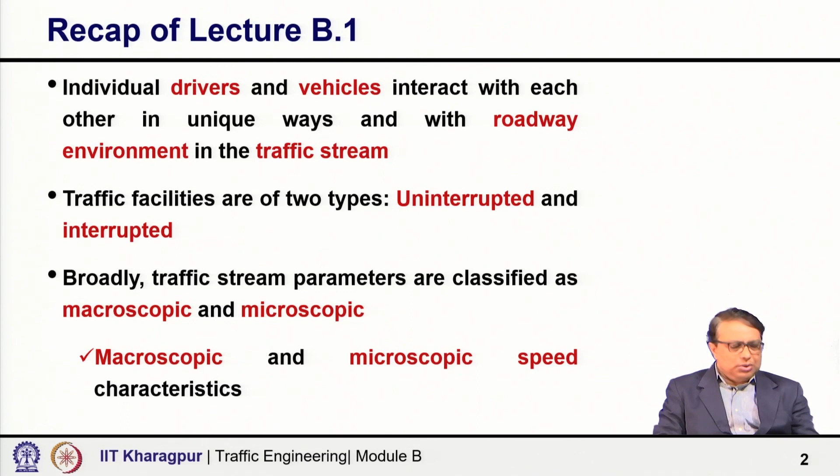Then I mentioned to you two types of traffic facilities, uninterrupted flow facilities and interrupted flow facilities. And then I mentioned to you the macroscopic and microscopic parameters of traffic streams. With this background, today let us focus on traffic volumes.

Traffic volume is normally expressed as the number of vehicles passing a particular point of road during unit time, and is expressed as either vehicles per hour or vehicles per day. So, we are talking about traffic measurements at a point; when vehicles are crossing, we are counting the vehicles. That unit time sometimes could be an hour, sometimes a day, and therefore we express the volume as number of vehicles per hour or per day.

Daily traffic volume is used for general planning purposes. If we want to upgrade road infrastructure, develop a new road, a new connectivity, we estimate the traffic volume, which is mostly the daily volume. But hourly volume is also required sometimes for detailed design. Maybe you want to understand the capacity; you will see what the design hourly volume will be and, matching the level of service you want, you would say how much capacity or how many lanes will be required.

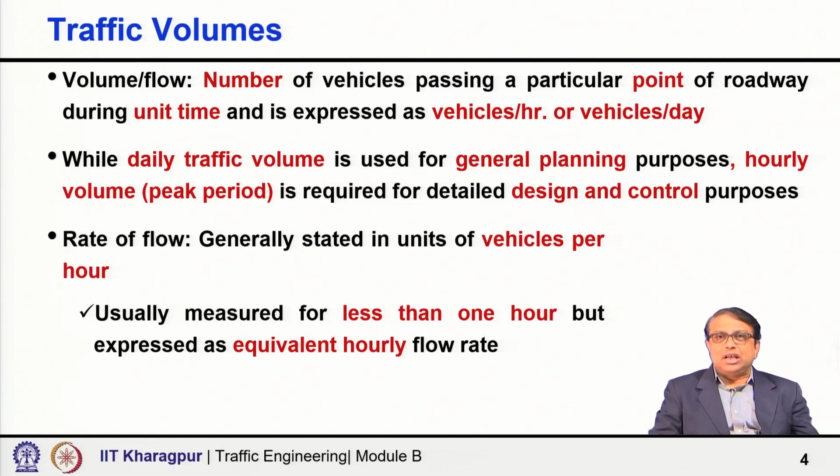As I said, traffic volume can be expressed in many ways: daily volumes, hourly volumes, sub-hourly volumes. So, let us see the different ways daily volumes can be expressed and why we need them. Forecast daily volumes are typically used to plan new facilities or improve existing facilities, and may be expressed in different ways. First, annual average daily traffic, AADT.

It is an annual average. That means theoretically we are making a count for 365 days in a year and taking the average of that. So, what will it include? It will include all seasonal variations that usually happen on non-urban roads, and in some cases some special other roads also. So, the seasonal variations will get captured. Somewhere maybe winter traffic is less, but summer traffic is more.

So, if we are taking a 365-day count, covering all seasons, all days, and taking the average, that is a true representation of the annual average, because we can simply multiply it by 365 to get the exact yearly traffic volume that the road has to handle.

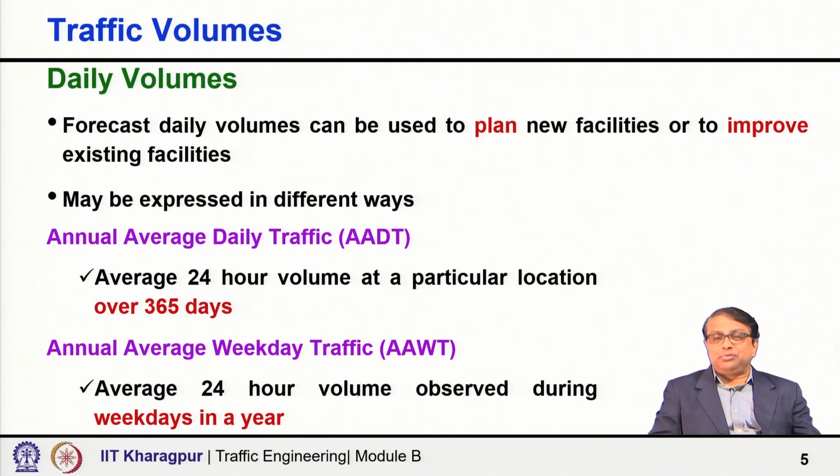If weekend traffic is typically less, then you will get annual average weekday traffic higher than the annual average daily traffic. In most cases we cannot directly measure the traffic throughout the year, because in a highway project you typically get 2 to 3 months, maximum 4 months, for the traffic part or traffic forecasting part. So, we cannot take 365 days of real measurements. So, what do we do there?

We measure typically for more than a day, but not for 365 days. So, if we are taking the average of traffic count more than a day, but less than 365 days theoretically, then that average 24-hour volume whatever we will calculate, we will call it as average daily traffic. The word which we are omitting here is annual, because it is not yearly average. It is something less than 365 days.

And as per current practice, for all the highway projects, we typically take 7-day traffic count. One complete week, we take an average of that to calculate the average daily traffic. Obviously, average daily traffic and annual average daily traffic will not be same, because the effect of seasonal variations will be different.

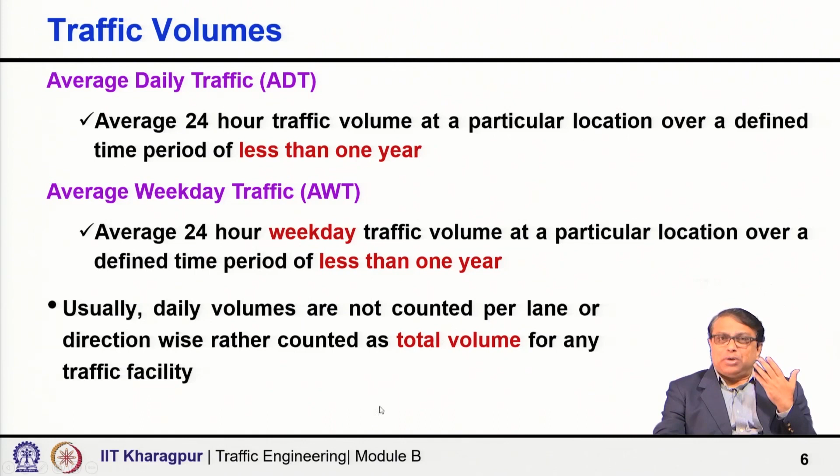Usually daily volumes are not counted per lane or direction wise, rather counted as total volume for any traffic facilities. I would like to clarify here, not counted means we may actually count it direction wise, but we rather express it as total volume. So, we may count it separately, but we express this as total volumes.

In urban traffic, this is very predominant in most cases, unless the city is really congested and overloaded and the peak has spread substantially over a longer period. There also we will get a peak, but the peak may not be so distinct, because off peak also may be still very significant, especially during the daytime, maybe 8 o'clock morning to 8 o'clock evening. Nowhere will you find traffic dropping drastically. So, how much peak you will get depends on the city, the activities happening in the city and so many other factors.

But typically you will have morning and evening rush hour, the traffic volume will be high, and the road capacity is expressed generally in terms of hourly volume: how many vehicles we can pass through a given section in an hour. We may relate it to the daily volume, that is a different thing. End of the day we may say what is the ADT and how many lanes are required to serve the traffic volume with a desired level of service. That is a different thing. We may still eventually connect it to ADT or AADT, but generally the capacity is for hourly traffic.

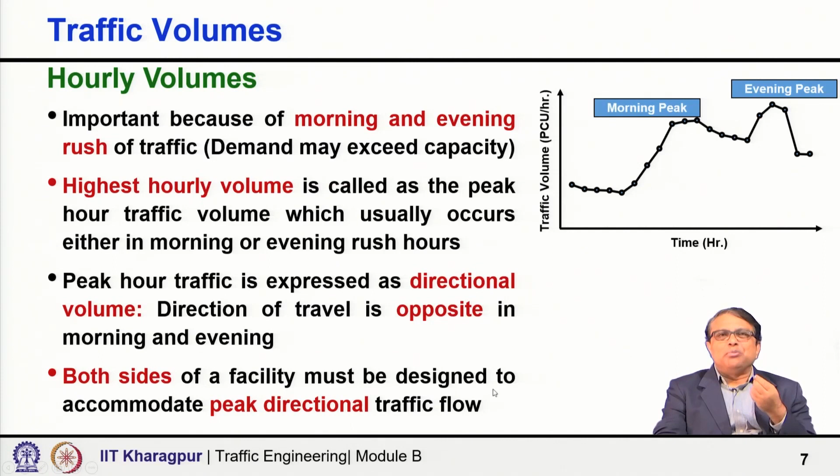And maybe if the road is a divided road or even otherwise, we need adequate capacity to support the directional volume. So, both sides of the facility, up and down, morning maybe towards the CBD, evening away from the CBD, and if it is a divided road, must be designed to accommodate peak directional traffic flow. In design, usually AADT is used to calculate peak hourly volume.

What I try to mean is that we express the peak or the design hourly volume relating it to the AADT. Why AADT? Because AADT is more stable than hourly volume. You are expressing it as annual average daily traffic, so it is more stable as compared to the hourly volumes. But then, as I said, that connection is required. We eventually need the hourly volume. So, hourly volume is expressed as a function of AADT, annual average daily traffic.

Here I have shown, if it is directional, the directional design hourly volume: how we can calculate it as AADT into D into K. What is D? D is the directional factor, how much split of this AADT is in the direction of peak travel. And K is what? K is the proportion of daily traffic during the peak for the design purpose, how much percentage of AADT is occurring actually during the peak hour, or how much we take for the purpose of design.

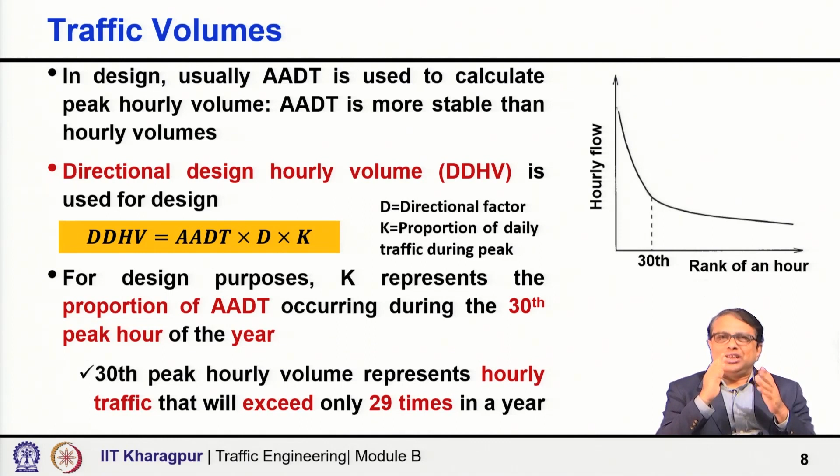The 30th highest hourly volume usually is found in the range of 8 to 10% of the AADT, as traffic engineers have observed for roads. So, we calculate the daily volume, convert it to AADT, and then 8 to 10% of the AADT is taken as the design hourly volume, and accordingly we see how much infrastructure or how many lanes are required to ensure the target level of service.

Sometimes even the hourly volume is not sufficient for analysis, and we need sub-hourly volumes. If you are doing signal design, we need peak 15-minute traffic flow. That is why I will talk now about the peak hour factor. Traffic facilities may be adequate for the peak hour, but may not be adequate in shorter intervals, because volume within the peak hour varies widely.

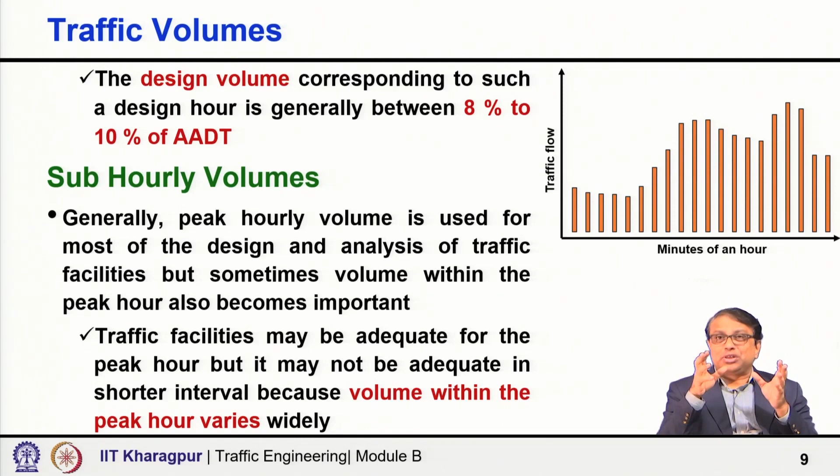Within the 60 minutes, the four 15-minute intervals are not the same; there is again substantial variation. So, we need to care for the sub-hourly volume also. Design should be based on the maximum rate of flow over a period, say 5 minutes or 15 minutes, observed within the peak hour. For most practical purposes we take a 15-minute period, because flow during this period is considered to be stable.

Even 10-minute flow also could be stable, 5 minute, but not less than 5 minute. So, that means if you take every minute flow, there will be tremendous fluctuation. In some cases, if you convert the flow rate, it may be very high, which is practically not possible as a steady flow. You may get it in 1 minute or 2 minutes, because maybe before or after that there was no traffic. So, somehow it could pass, but steady state you cannot get.

So, when we take the duration, the stability is very important. Is it stable? Can the road repeatedly take that much traffic over a period of time? That is very, very important. So, the duration cannot be too short. Normally, we take 15 minutes. Now, as I said, for signal design purposes, we need the peak 15-minute flow rate.

So, the relationship between hourly volume and maximum rate of flow within the peak hour is defined by the peak hour factor. What is peak hour factor? It is the hourly volume divided by peak rate of flow within the hour. Typically, if we take 15 minutes, that means hourly volume divided by 4 times peak 15-minute volume. That is the peak hour factor. Theoretically, peak hour factor could be 0.25 to 1.

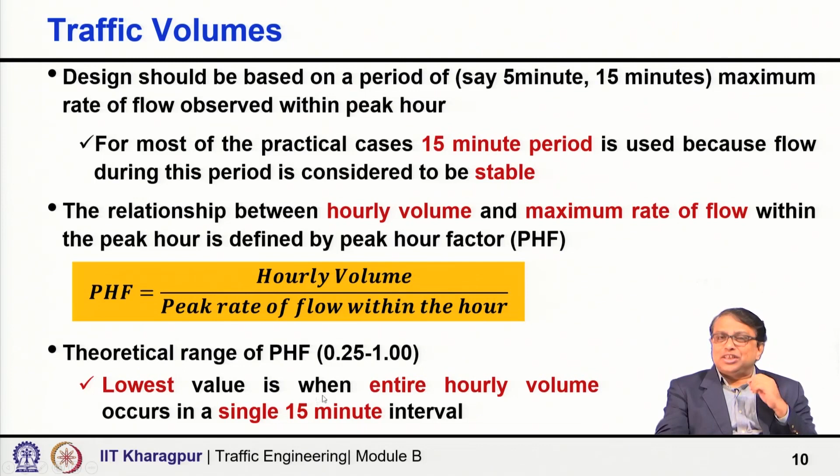The lowest value we get when the entire volume occurs in a single 15-minute interval. Whatever traffic or demand passes in the whole 60 minutes actually passes in one 15-minute interval, and therefore, in the remaining three 15-minute intervals there is 0 traffic. So, in that case, theoretically, we get the lowest value 0.25.

And we get the maximum value, that is 1, when there is no variation in the flow within an hour. All four 15-minute period traffic volumes are exactly the same. So, whether you take one particular 15-minute volume multiplied by 4 or the whole 60 minutes, you get the same number. In that case, the value will be 1, but the practical range is 0.7 to 0.98.

I have taken a small example here: for different time intervals, I have given the 15-minute traffic volume, and I want you to identify the peak hour and the peak hour factor. So, what we can do is add up four 15-minute volumes: 4 to 5 o'clock, 4:15 to 5:15, 4:30 to 5:30, 4:45 to 5:45. If you calculate, you get 4 to 5 is 1793, 4:15 to 5:15 is 1876, 4:30 to 5:30 is 1911, and 4:45 to 5:45 is 1803.

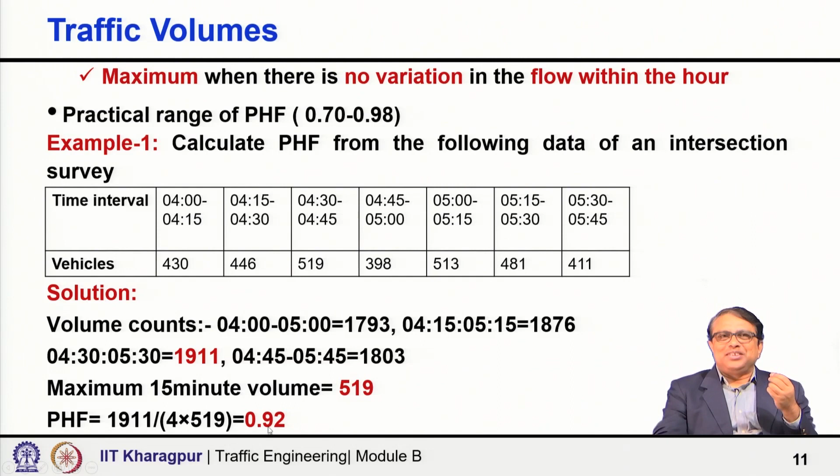So, obviously, the maximum is 1911. So, the peak hour is 4:30 to 5:30, right, and the maximum 15-minute flow within 4:30 to 5:30, these 4 columns, is 519. So, what is then the peak hour factor? Peak hour factor is 1911 divided by 4 into 519. So, that is 0.92. Now, we go to the next parameter, that is called time headway.

What is time headway? It is considered to be a microscopic flow parameter. Volume is macroscopic, but headway is microscopic. I have mentioned this in my first lecture in this module also. So, it is considered to be a microscopic flow parameter and is defined as the elapsed time between the arrival of a pair of vehicles, maybe front to front.

It need not always be front to front; any part to any part you can take, you will get the same time headway. But normally it is taken front to front, because if you put a detector, the detector detects the front of the vehicle. So, the front of the vehicle passes, and then the next vehicle's front touches again. So, the time gap between the passage of the front of the first vehicle to the front of the next vehicle is called the time headway.

As I have shown here, this is one line, T2, T3 is another line, but I have also shown one more line in a different color, blue. So, these 3 lines are black and this line is shown as blue. So, the time headway actually includes 2 components. One is the occupancy time and another is the time gap. Occupancy time is for what? It is for the physical vehicle to pass the observation point. That means the front touches, but the whole vehicle has to pass.

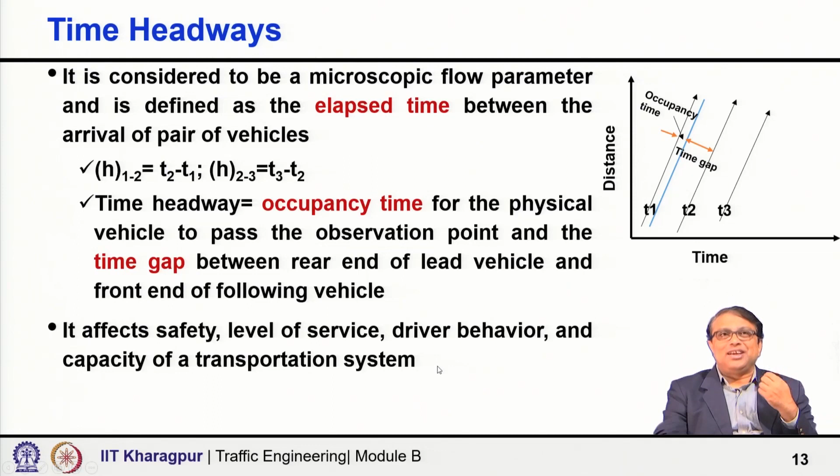It affects safety. Time headway is very important from the perspective of safety. It also influences the level of service. It influences the driver behavior, how drivers are going to react, and also the overall capacity of the transportation system.

Distribution of time headways determines the requirement and opportunity for passing, merging and crossing. I have mentioned this also. The time headway is very important. Doing the maneuver, people look at the time headway. So, the capacity of a system depends on the minimum time headway and the headway distribution. Headway is a microscopic parameter. So, for every pair of vehicles the headway may be same, may be different. So, it follows a distribution, or there is an element of variability in these microscopic measurements.

Therefore, the next topic, classification of time headway distributions. Time headway certainly follows a certain distribution, because sometimes vehicles may follow the same headway when they are moving in a platoon. They may be clearly following a lane discipline, similar kind of vehicles, homogeneous traffic stream, they may follow a fixed headway, but in most cases there will be a variation of headway, and therefore, the classification of time headway distribution is important. Shape of headway distribution varies as traffic flow changes.

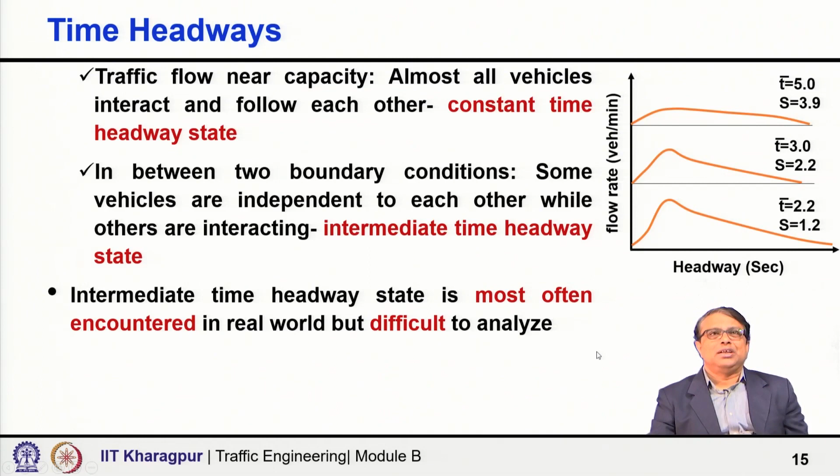Now, the intermediate traffic state, intermediate volume, is quite a significant range actually, and that is what we mostly encounter in reality, but it is the most difficult thing to analyze, because neither will all vehicles be following random behavior, nor is it a completely or largely platoon-driven movement. Now, a little bit of discussion about each of these three states.

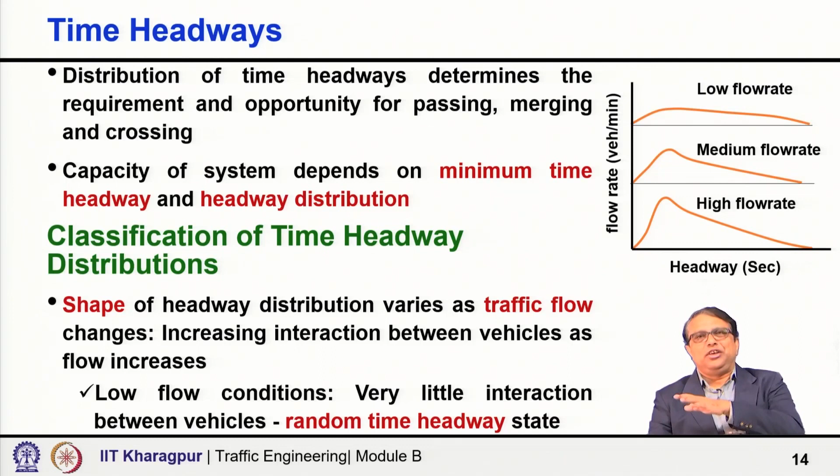First is the random headway state distribution. When will the random headway state distribution happen? I have said when it is a low flow condition. I am not defining exactly what volume or what range, but generally as a traffic engineer you can sense whether it is low, medium, or high. So, when there is low flow, you expect the random headway state distribution.

In this case, the gap or headway distribution function can be derived, carefully observe. I am not saying it is the Poisson distribution; it can be derived from the Poisson distribution. The Poisson distribution is essentially a distribution representing the counting of vehicle arrivals, how many vehicles are arriving. So, the Poisson counting distribution can be used to get the headway distribution under the random headway state.

What is the expression given here? This is for the Poisson distribution: P(r) equals (lambda t) to the power r, e to the power minus lambda t, divided by r factorial. When no vehicle arrives in a time interval of t seconds, r equals 0, because P(r) is the probability of arrival of r vehicles in any interval of t seconds, lambda is the average rate of arrival, and t is the time interval. Hence P(0) is the probability that there will be no vehicle during a time period t.

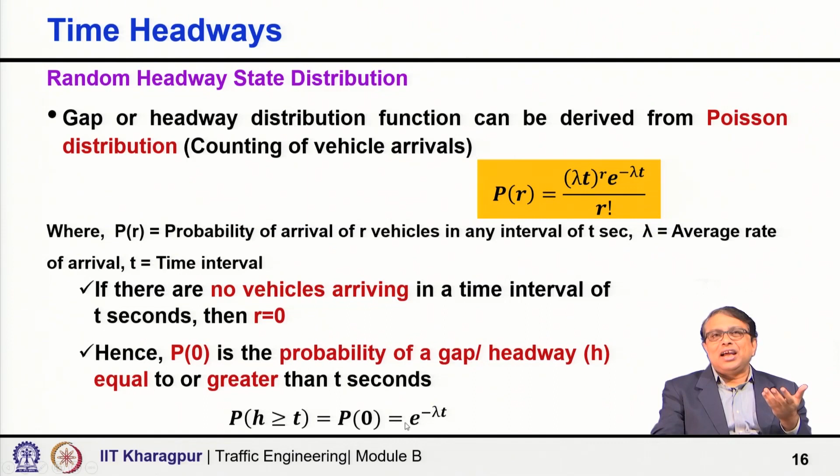That means, in a way, the probability of getting 0 vehicles in an interval is equivalent to the probability of a headway greater than or equal to t seconds. So, the probability of h greater than or equal to t equals the probability of getting 0 vehicles, and using this expression, that is e to the power minus lambda t.

So, this formulation for headway distribution is called the negative exponential distribution of headways, or generally we call it the exponential distribution. The word negative we may not utter every time. So, what then is the probability of a time headway between t1 and t2? That is, the probability that the headway will be greater than t1 and less than t2.

Let us take an example. An observation on an expressway yielded a count of 200 vehicles in half an hour. Calculate the number of headways in this count greater than 4.5 seconds and less than 18 seconds separately. Here we know the probability of headway greater than t is e to the power minus lambda t. So, lambda is 200 vehicles divided by half an hour, 30 into 60 seconds, so 0.11.

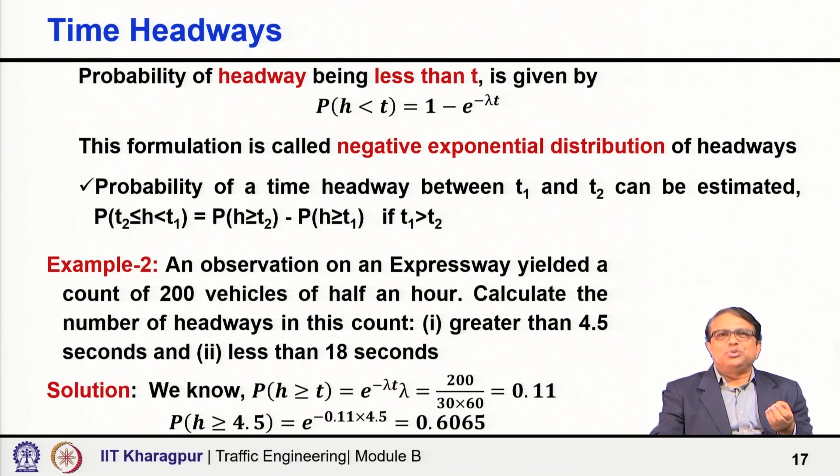So, what is the probability that the headway is greater than 4.5 seconds? It is e to the power minus lambda t, with lambda 0.11 and t here 4.5 seconds. So, you get 0.6065. Then I have 200 vehicles, so 199 headways. So, the number of headways greater than 4.5 seconds is simply 199 multiplied by 0.6065.

Similarly, for headways less than or equal to t seconds, 18 seconds, the same way you can calculate 1 minus e to the power minus lambda t. Here it is 0.8647. So, the number of headways less than 18 seconds is 199 into 0.8647, that is 172.

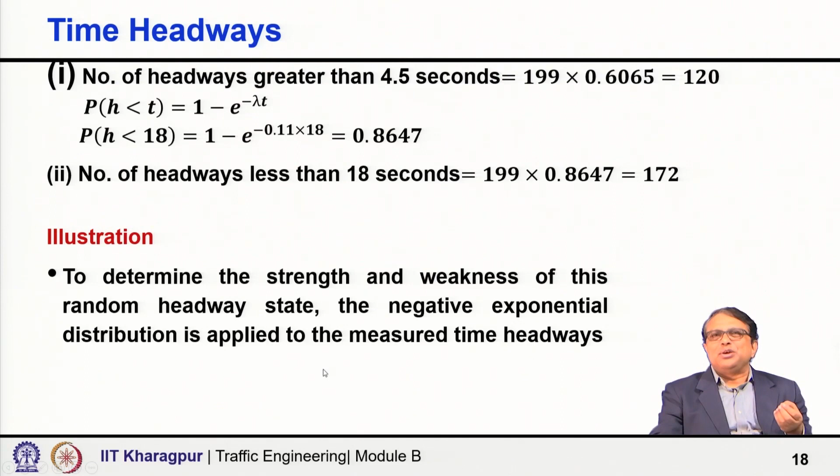Now, to determine the strength and weakness of this random headway state, we are trying to apply the negative exponential distribution to measured time headways. I am not giving you all the data here, but just trying to show you some calculation for low levels of flow, considering a mean headway of 5, that means lambda is 1 by 5, that is 0.2, and our number of observations is 1320.

So, here I am showing T_i: 0, 0.5 seconds, 1 second, 1.5, 2, like that up to 4.5. So, what is the probability that headway will be greater than this t seconds? It is e to the power minus lambda t. You can calculate it. I have shown you 2 calculations, and the remaining values are also calculated in the same manner. I am calculating i as this one and i minus 1 as this one. So, 0.5 is i, 0 is i minus 1.

So, what is the probability that headway will be 0 to 0.5, in that range? Then what would be the frequency, because our total number is 1320. So, whatever is the probability multiplied by the overall total number, you get the frequency. So, probability multiplied by the number 1320, you get the frequency.

Like that, for every duration, every T_i value, we calculate the probability of headway greater than T_i, and then what is the possibility that headway will be in between, and what is the respective frequency. Similarly, for 3 different flow conditions, in this example it was done. Then it is plotted. Now, I want to show you some observations here.

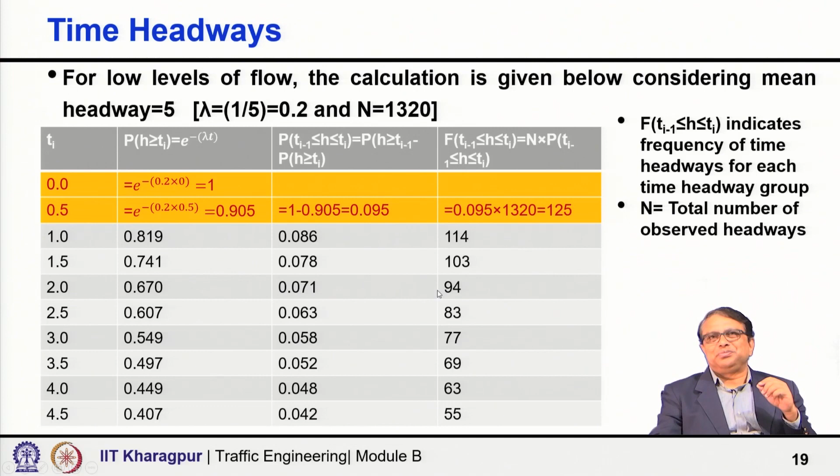So, what observations we derive here: the distribution has inherent characteristics that the smallest headways are most likely to occur. You can always see the smallest headway has higher frequency. You can see it here also: 125, 114, down through 94. So, that means smaller headway, higher will be the frequency. As time headway increases, probability consistently decreases, becoming lower.

The comparison between the distributions is best under the lowest flow level and worst for the highest flow level. If I have to compare how the measured and the distribution are matching, it is somewhat better for the lower flow, but as we are going to mid-range flow or higher flow level, the fit is becoming very weak. So, the best one is for the lowest flow level and the worst one is the highest flow level.

Even at the lowest flow level, the distributions are quite different for time headway of less than 1 second. If you consider less than 1 second headway, the dots and the green portion are distinctly different. From this range onwards, the match is definitely better. So, it shows that negative exponential distribution fails when the volume is high, and fails miserably when we apply it to the high volume scenario.

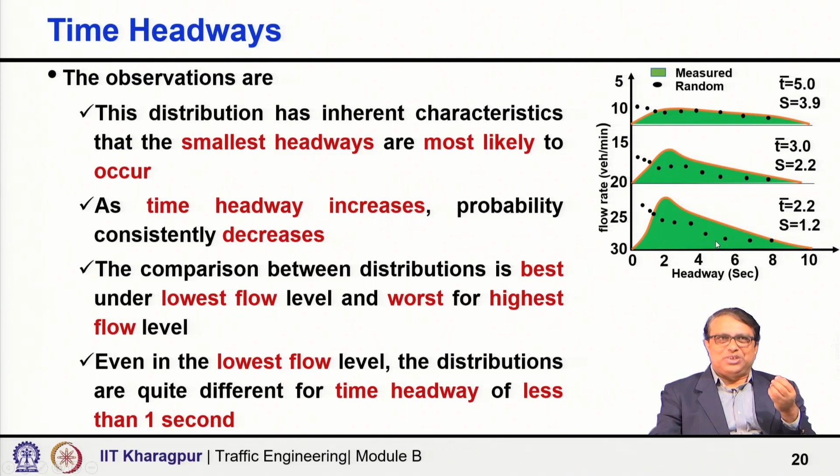So, now we go to the next part, constant headway state distribution. We know that for constant headway state, that means high flow condition, the negative exponential is not going to work. So, here we apply normal distribution. If headways are all constant, that is the first case: mean will be 1 by lambda and standard deviation will be 0. Or there is slight variation in headways due to driver error. Drivers will not exactly follow the same headway, so there will be some variation, not very significant. So, variation is not 0, not constant headway.

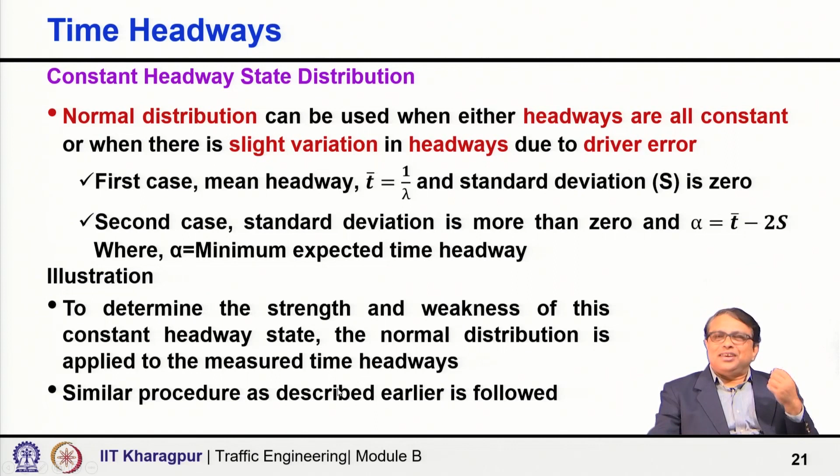In that case, the standard deviation is more than 0, and alpha, which is the minimum expected time headway, is t bar minus 2s. Now, again we apply this to some given data to tell you some facts and insights, following the similar procedure as I described earlier, and here are the results. Here you can see the normal distribution has inherent characteristics of being symmetrical, having a bell-shaped distribution.

But the actual field-measured distribution does not show symmetry. The comparison between the distributions is the best so far, even though not exactly very good. In comparison, when I compare 3 different traffic states, I find that the normal distribution gives the best possible match for the highest flow level, and it becomes worst for the lowest flow level.

So, the negative exponential distribution behaved the other way: at the low flow level it was somewhat better, and as the flow was increasing it became worse. In the same way, in reverse, the normal distribution fitted comparatively better for the high flow level, and as we move towards the low flow level, the fit becomes even worse.

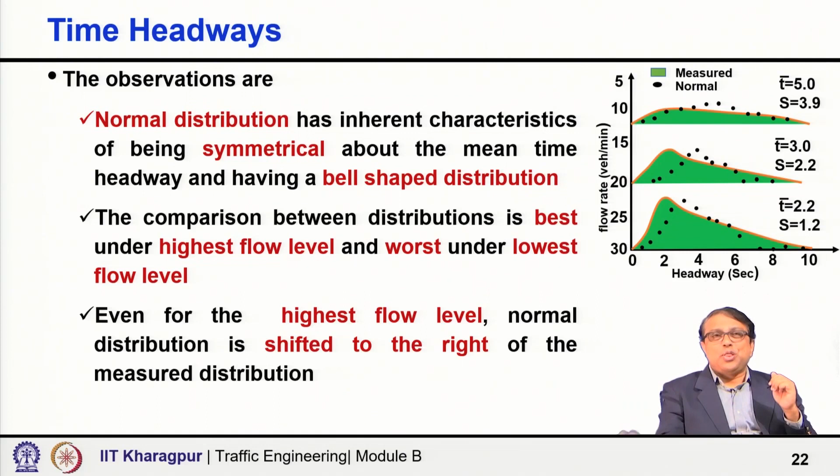Here two things are very important: a parameter which is a function of the mean time headway, and two user-specified parameters, k and alpha. k is popularly known as the shape parameter, because it affects the shape of the distribution, alpha is a user-selected parameter greater than or equal to 0, and Γ(k) is the gamma function.

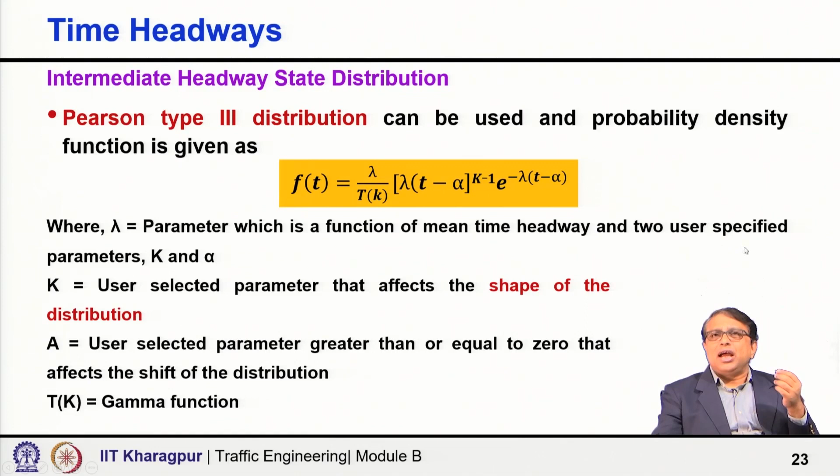So, k is the shape parameter, and there is a parameter which is a function of the mean headway and two user-specified parameters. Depending on the values of k and alpha, the Pearson type 3 distribution can be converted to simpler distribution models. It could be the gamma distribution, the Erlang distribution, and even the negative exponential distribution is a special case of this generalized Pearson type 3 distribution for some specific combination of k and alpha, the shape parameter and the shift parameter.

When alpha equals 0 and k takes any positive value, the Pearson type 3 distribution becomes the gamma distribution. When alpha is 0 and k takes only positive integer values, it becomes the Erlang distribution. When alpha equals 0 and k equals 1, it becomes the negative exponential, and with alpha greater than 0 and k equal to 1, it becomes the shifted negative exponential distribution. Here, instead of e to the power minus lambda t, it is e to the power minus lambda (t minus alpha).

Now, as in the two previous cases, I try to show what findings came out when it was applied to some given data. Here again low, medium, high, but remember that only a single Pearson type 3 distribution was investigated for each traffic flow level, and therefore the k and alpha values are only approximate estimates of the best Pearson 3 parameters. You need to do sensitivity analysis to find the best. That was not our objective. Here we only try to show how the Pearson type 3 distribution looks when applied individually to each case.

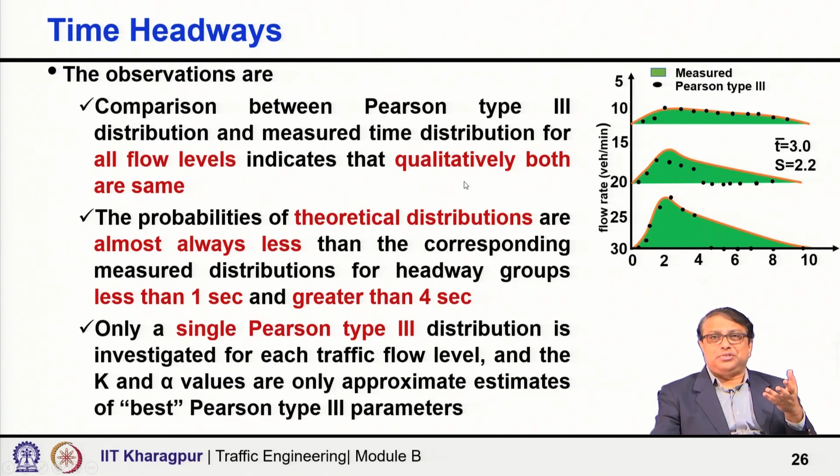In the comparison, the probabilities of the theoretical distribution are almost always less than the corresponding measured distribution for headway groups less than 1 second and greater than 4 seconds. In general, the comparison between the Pearson type 3 distribution and the measured distribution for all flow levels indicates qualitatively both are the same, somewhat better. So, people are using Pearson type 3 distributions and more advanced distributions to better fit the headway distribution observed in the field.

So, with this I close it. We discussed traffic volumes, different expressions, daily, hourly, sub-hourly volume, time headway, the random, constant and intermediate headway states, and specifically the experience with the negative exponential distribution of headways, the normal distribution and the application of the Pearson type 3 distribution.